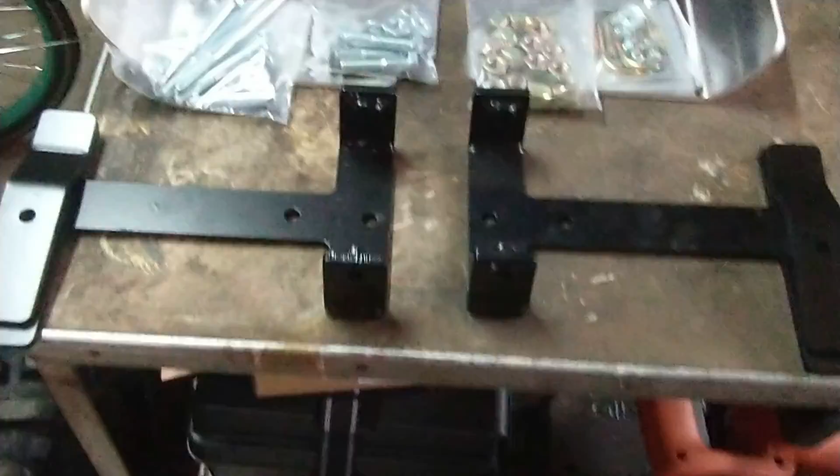Okay, let's see here. Left front tire. Right front tire—you can tell by the direction of the arrow.

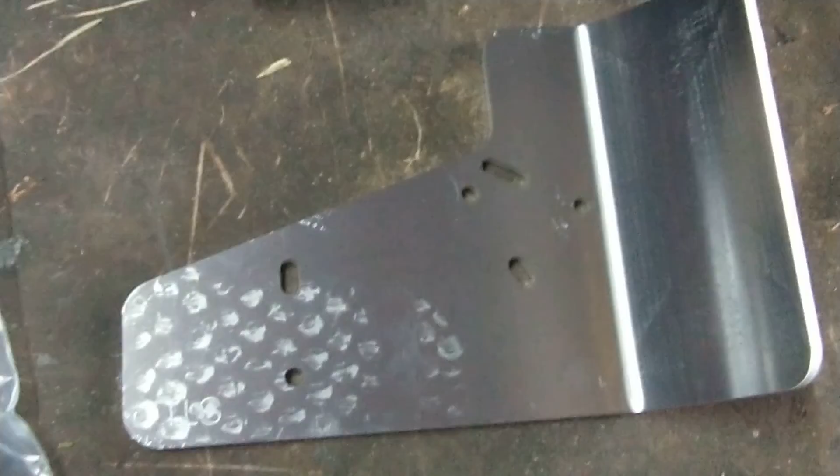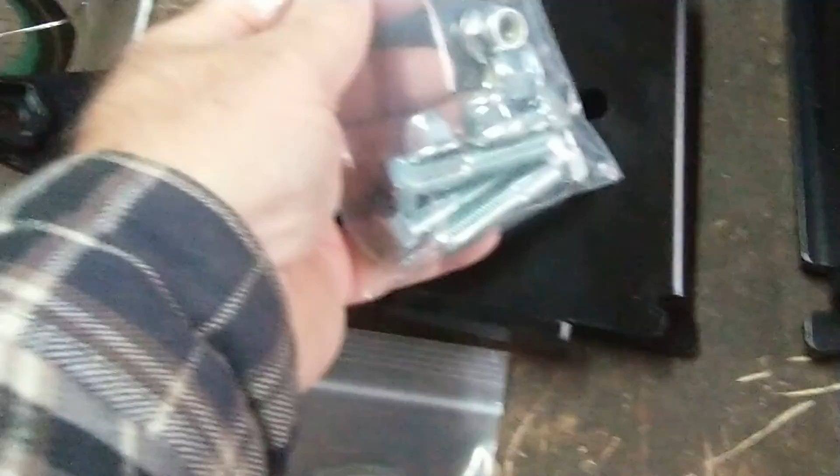Footrest protectors, not sure why we need those, and hardware to install the footrest protectors. Looks like replacement lug nuts. Hardware bag for the front brackets, and hardware bag for the rear—so left rear and right rear. And these screws are long enough to go from there to here.

Alright. Hopefully they sent me everything I need for the project. There you have it. Stay tuned, let's get started.

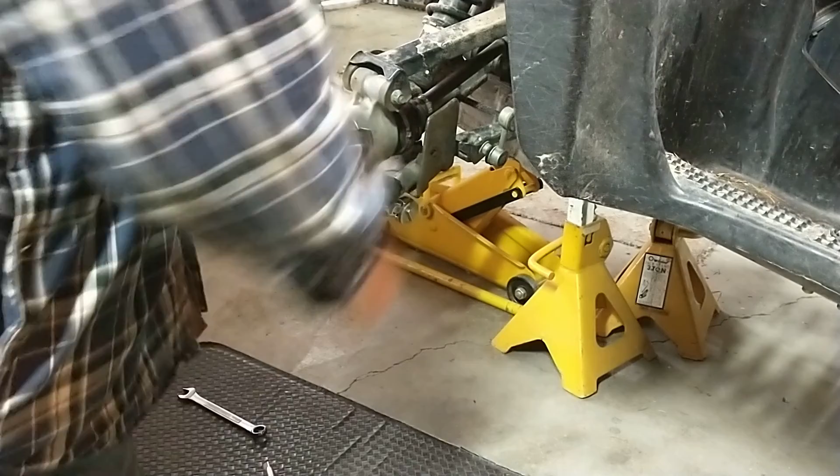Yep, 14mm on this side and 12 on that. You know, sometimes the Japanese have some really weird thought processes about engineering. Socket, or one of them.

Well, good thing I read the instructions again, because this bolt has to go through there ahead of time, because it will not fit. So I gotta do the same thing here. That bolt goes through there.

There we go. Looks like it's supposed to use the nuts that have the flange on it.

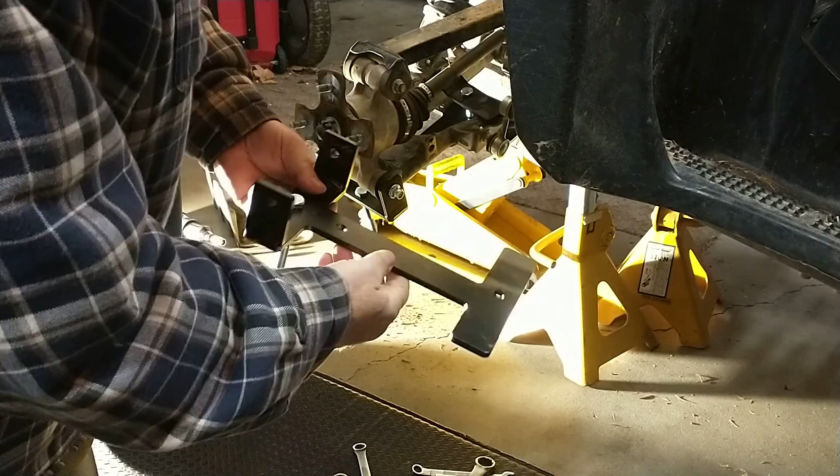Oh, and I went through the manual, and the parts diagram shows different part numbers for left and right. But those part numbers on the manual don't match anything printed on this. And both of these have the exact same part number stamped on them—where'd it go? Right here. I don't know if that's going to show up, but it says S4RR, both of them. But they're not exactly the same—one has it stamped on the front, and one has it stamped on the back. So, there we go.

By the way, this is the right rear axle that we're working on.

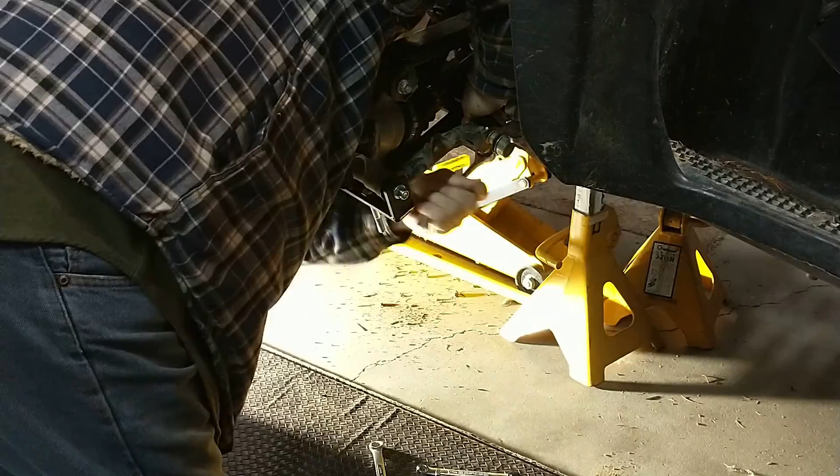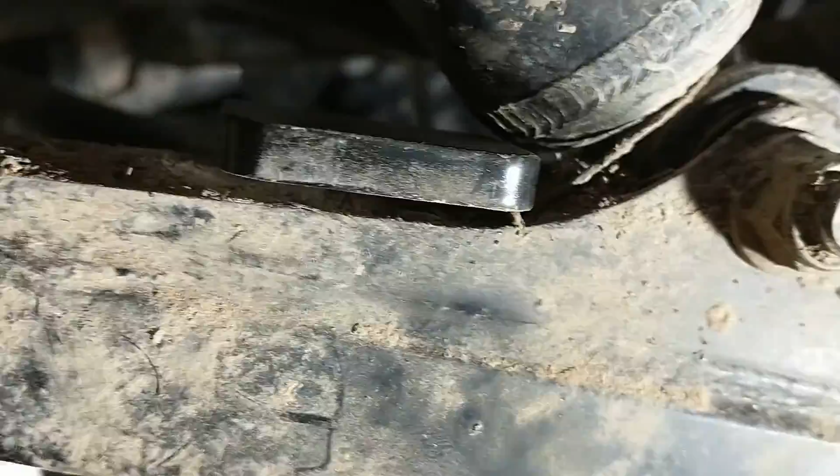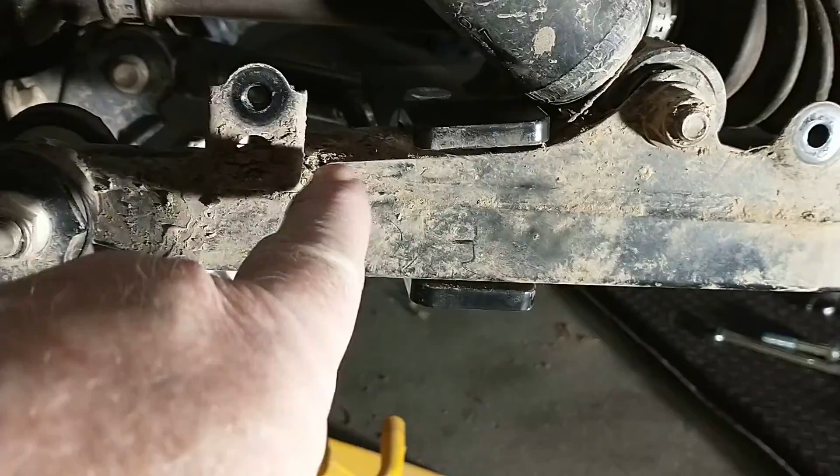It's going to show. So the bottom is fairly flush, but there's a gap in there. It's like these things need to be an inch longer—they need to stick out to here. Maybe, I don't know. This is not square tubing, so I'll have to keep an eye on that. I don't like the idea of that digging into my A-arm, where I wind up having to replace it every year.

Okay, and for the big reveal on why we're doing this, here we go. That's some heavy son of a bitch.

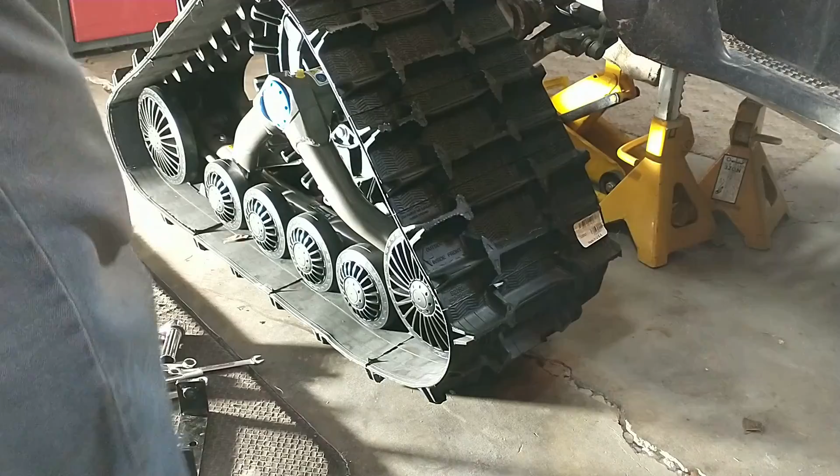Alright, so these puppies are really expensive, almost as much as what my quad is worth. But it hopefully gets me through part of December and into May, where I can't get up in the mountains because there's too much snow. So I turned my ATV into a quasi-snowmobile.

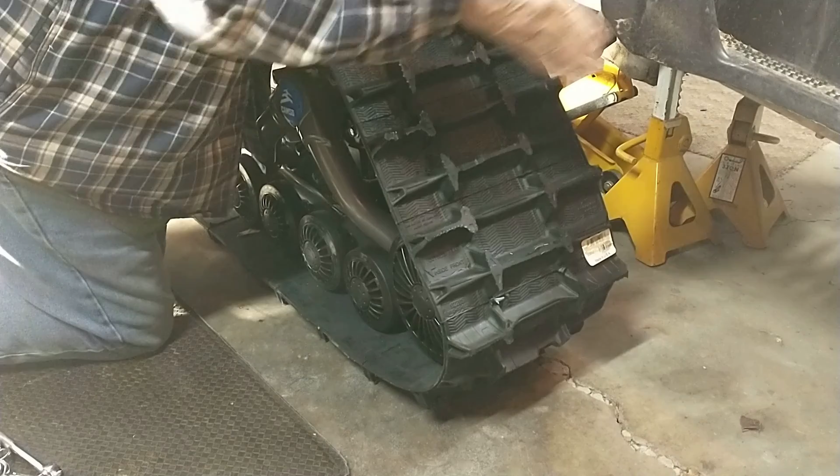I've talked to some people that own snowmobiles and own quads with tracks, and they say the tracks are the way to go. So we're going to give it a shot and see if I can get up to my favorite spots this year, if I can get this thing installed correctly. Because once I get them all installed, then you have to align them so they're all four in alignment, and I haven't looked at the instructions on how to do that yet. So we shall see.

Oh wow, multi-wheel bolt pattern. Lovely, so it's whack-a-mole time, or fit the square peg into the round hole—guess which one is which? There's nothing I see in the manual that says which set of these 12, 13 holes to use for a Suzuki KingQuad. Okay, I'm going to get a real tape measure.

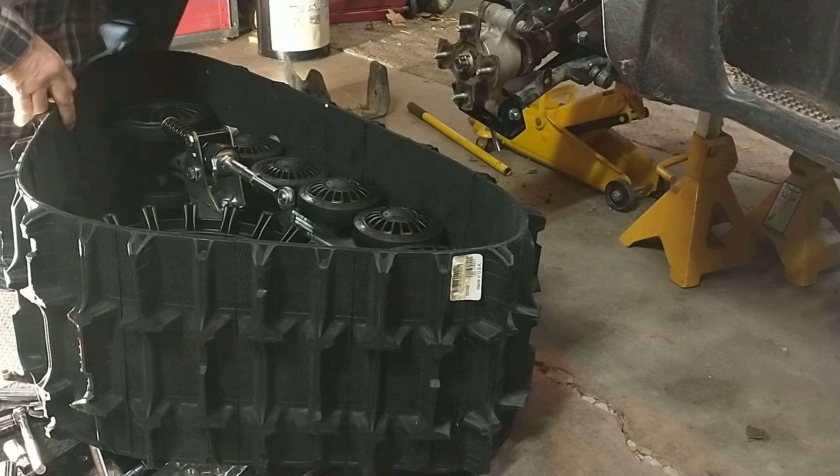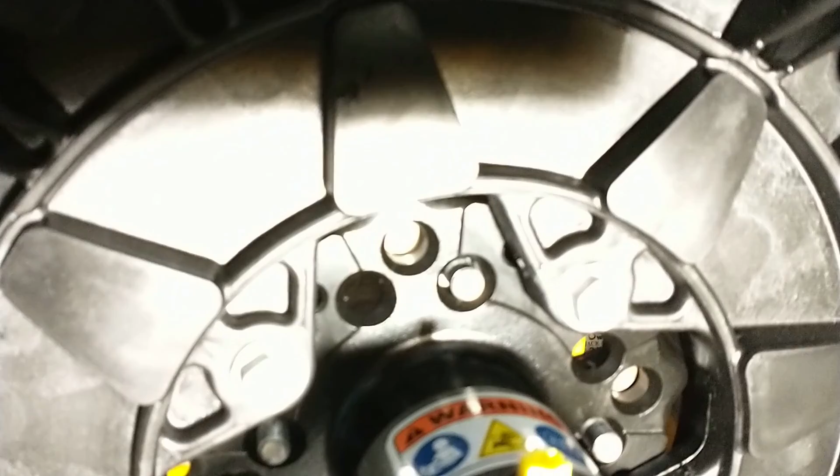Throwing about 7/16, by about 4 3/4. Okay, I don't know if you can see this or not, but the stud is right there in that hole. So the lower left, upper in the middle, and lower on the right, on the top lug nut, and the rest of them fit in there.

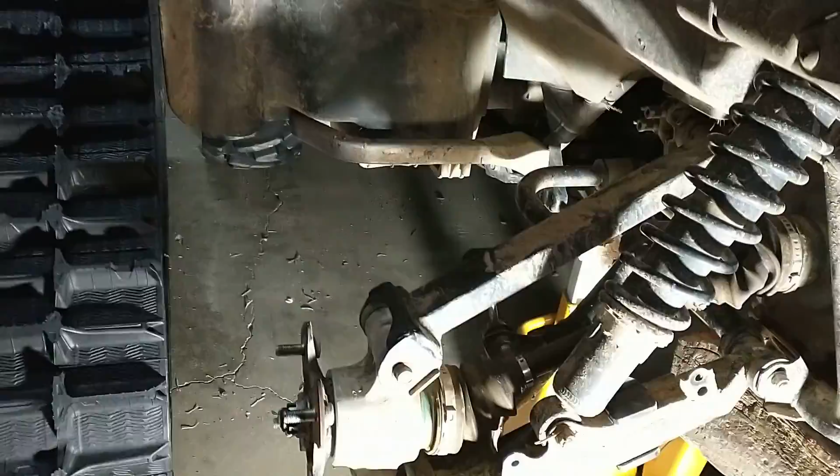That one, that one, that one, and that one. Okay, we're on the left rear side, and this side actually went on fairly much without an issue, maybe because I knew how it's supposed to go on.

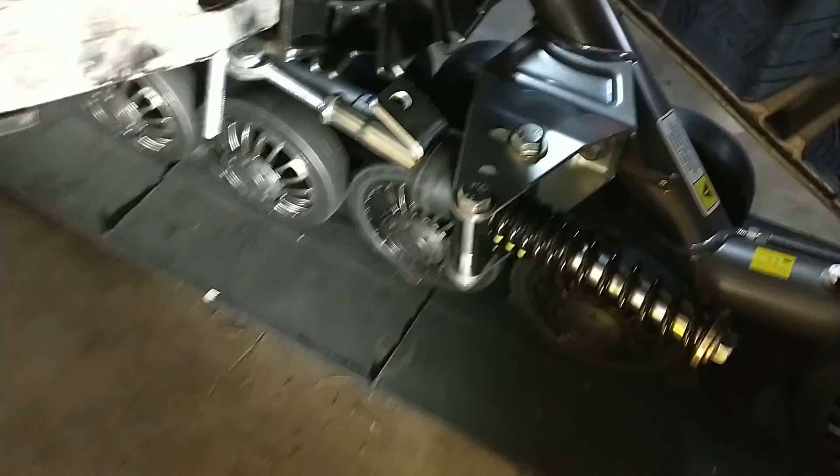So I'm ready to put the undercarriage on, and I'm not going to bore you with lining up those lug bolt holes. But as soon as I get both sides mounted, there's a stabilizer bar that has to be mounted on each side. So I'll come back after I get this jack out of the way and show you that part.

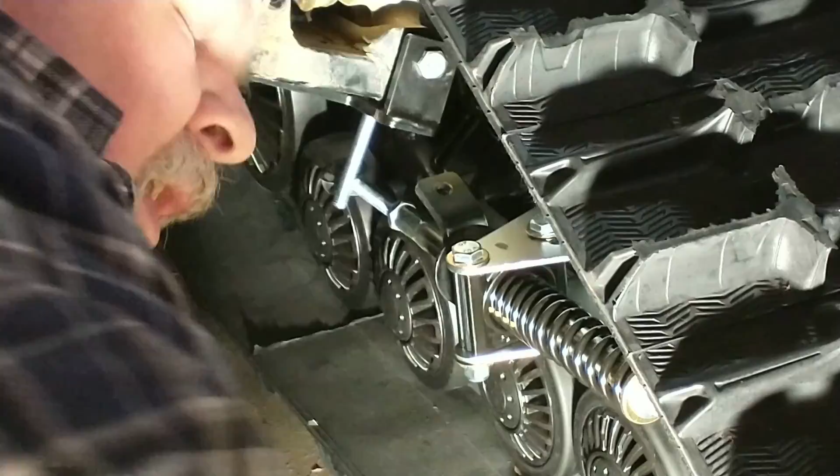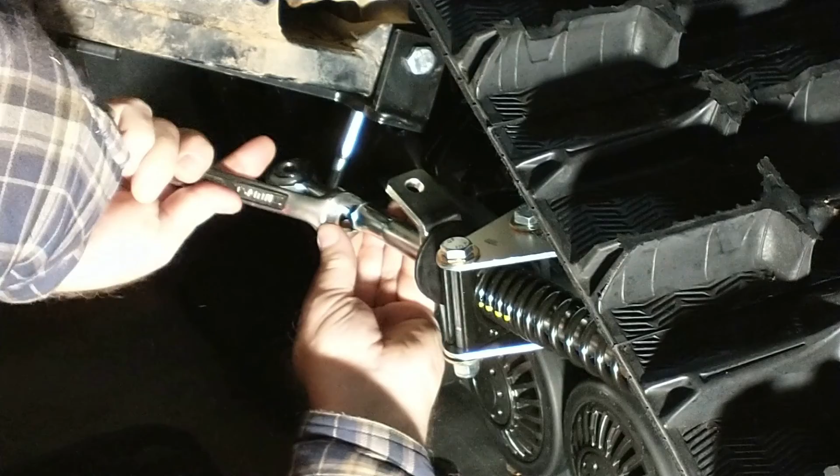I'll try and attach this stabilizer bar to that screw. Whoa. Huh, okay, I'm gonna have to—that's 18 millimeter, maybe a 19. I gotta loosen this nut so I can spin this in, otherwise I am never gonna get that attached.

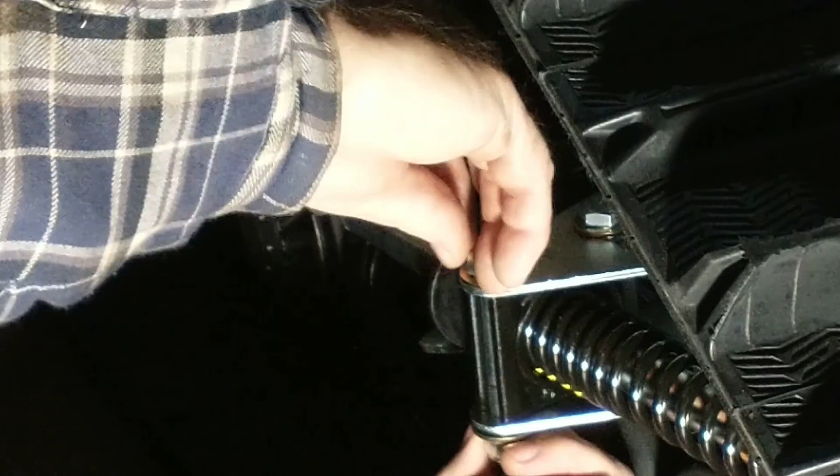Here. Anyway, there's nothing in the instruction manual about having to loosen this up and adjust it. Wow. Let's see if we can do that. Okay, that loosened it. And there's nothing in the instruction manual that says to tighten these down, but they're barely on there, so I'm going to tighten them before we're done, and hopefully that doesn't screw anything up. Because that nylon lock nut has barely got any bite on here at all. Boy, you got to really thread this down some.

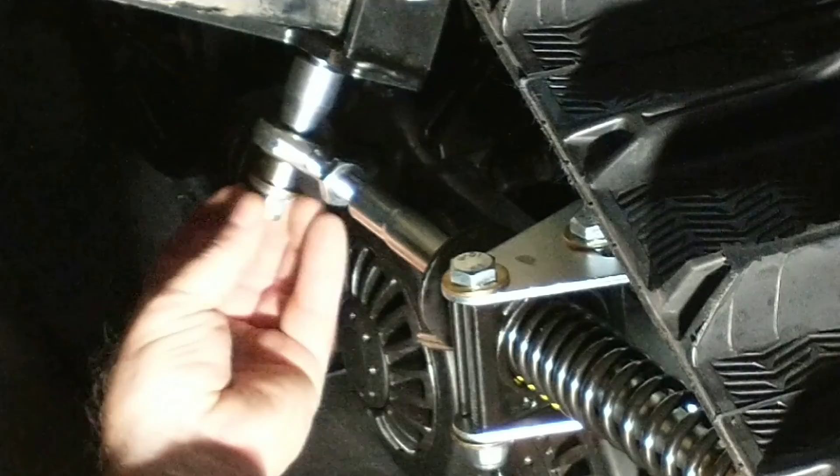Okay, so if we get too carried away, this part has to go on here, slides up into there. Spacer, and a flat washer. And this is a nylon lock nut—it's also got a flange washer built into it. It's 17.

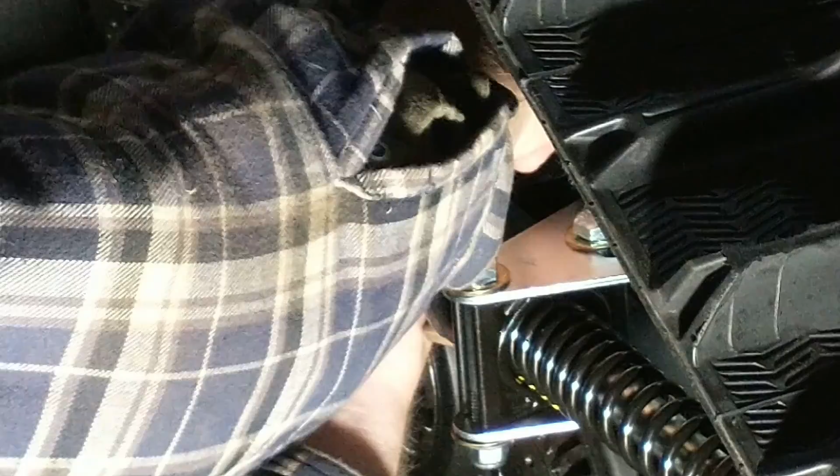I don't know if it's going to show on the camera, but this spacer up on top has about a quarter inch of play. So I'm going to try and get that tightened up.

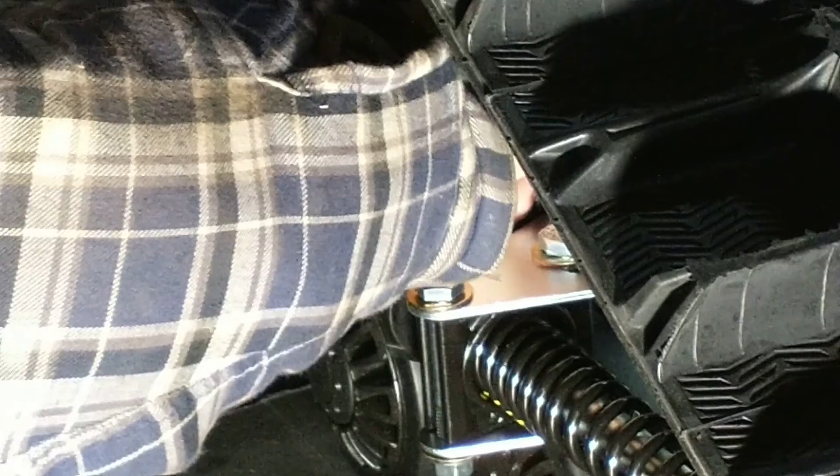Son of a bitch. Ha! I don't think that's coming off of there.

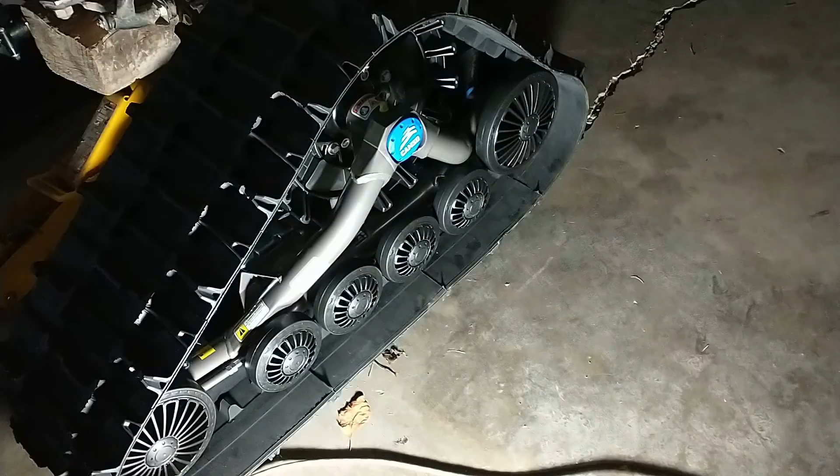I'm going to go ahead and tighten this for now. There's a lug nut. I had to roll this thing forward so I can get wrenches on them, but I need to jack it back up again so I can make sure these undercarriages, as the manufacturer calls them, the track hubs, are able to get flush all the way up against the wheel hubs that are part of the ATV. So I'm going to jack it back up again.

Now I don't know if you can see that track is moving quite a bit there. Alright, I should be able to get these lug nuts tightened up now.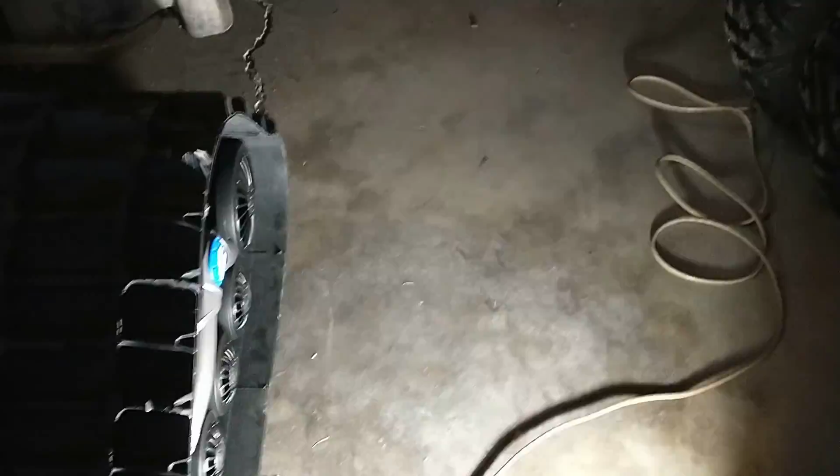I got the stabilizer bar connected on the other side, and I tightened those two bolts too while I was under there. Wonderful instructions they have on the manual here, because they don't address that at all - spinning that eye bolt in and out. Maybe it'll be addressed when I get to the alignment portion. I don't know, we'll see.

So I had to pull this forward a few inches to get those lug nuts to rotate where I could get a wrench on them. So I'm going to get that done, check things out, and then we'll get started on the front. Oh, by the way, this is the left front.

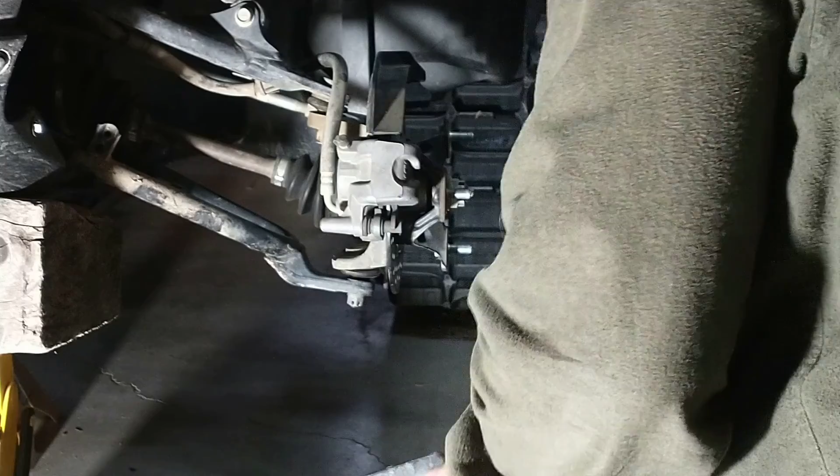Okay, this guard, both sides, has to come off - guard, skid plate, whatever you want to call it. The good news is, unlike the rears, I don't have to disassemble the A-arm to get this to work, I think, according to the instruction sheet.

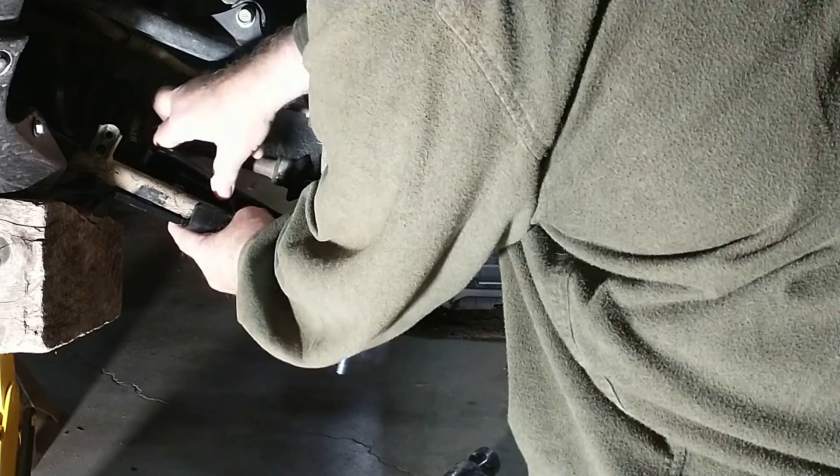That is got an insert there, so I line the bolt up, and that way we'll be able to tighten it. Will it hold? We'll see. Get that out of the way.

Instructions show the bolts coming up through the bottom. Seems kind of weird to me.

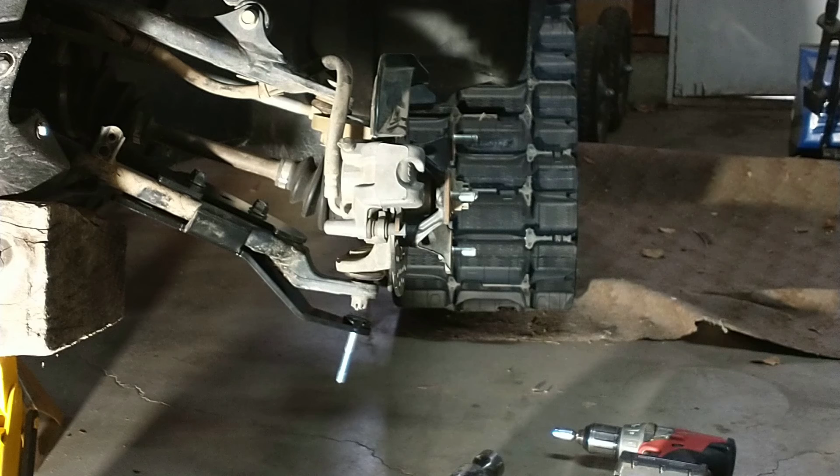Instructions say, position the bottom part of the anchor bracket, 2-3, underneath the lower suspension arm. Position the top part, 4-5, over the suspension arm so that the tenon slips into the mortise cut in the bottom part. Insert the M10 by 50 millimeter bolts through the bottom and secure the two parts together with the nuts provided. Tighten assembly to 37 foot-pounds of torque. Refer to figure 13. See?

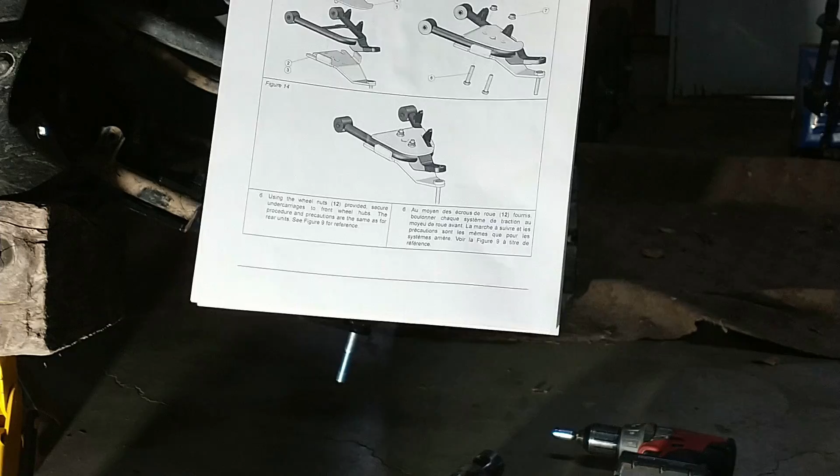Nothing about adjusting this back and forth. Using the wheel nuts provided, secure undercarriages to front wheel hubs. The procedures and precautions are the same for the rear. See figure 9. Figure 9 was the figure for the rear hubs.

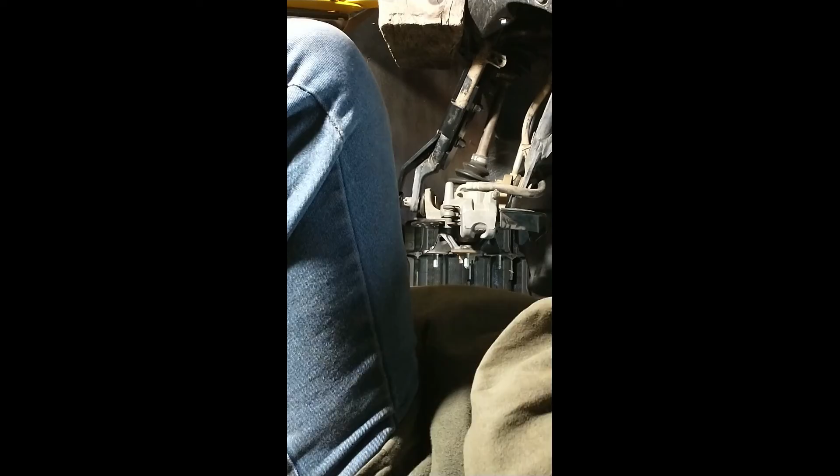I want to show you something. These are also labeled inside. So on the left you can see the wheels turn - that's front steering wheel, front steering axle. So this is saying this is the left front.

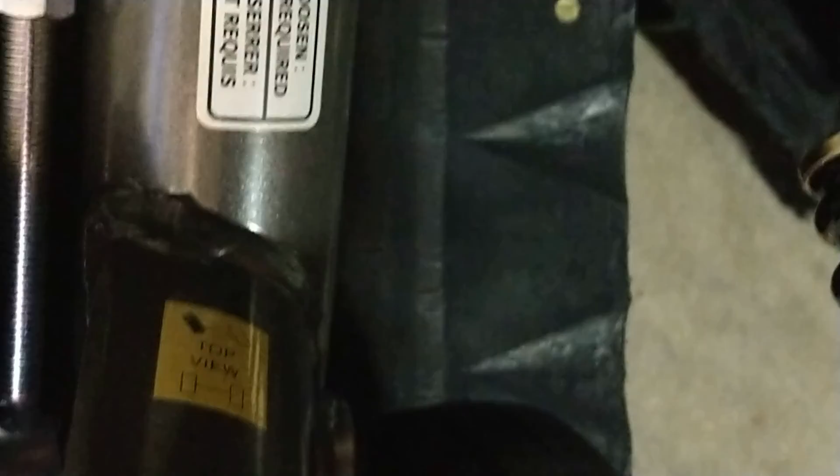I don't know if the camera will fit in here. Left front to this. Well, these front tracks are definitely lighter than the rear ones, but I don't know if that's really saying much. Phone ran out of storage when I was doing the other side, but this side here, two clamshell pieces went on just like the other side did.

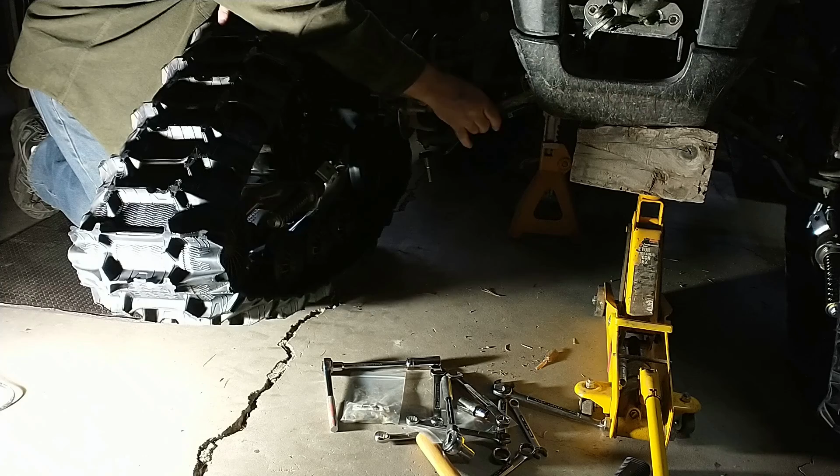Oh, there we go. Alright, down we go.

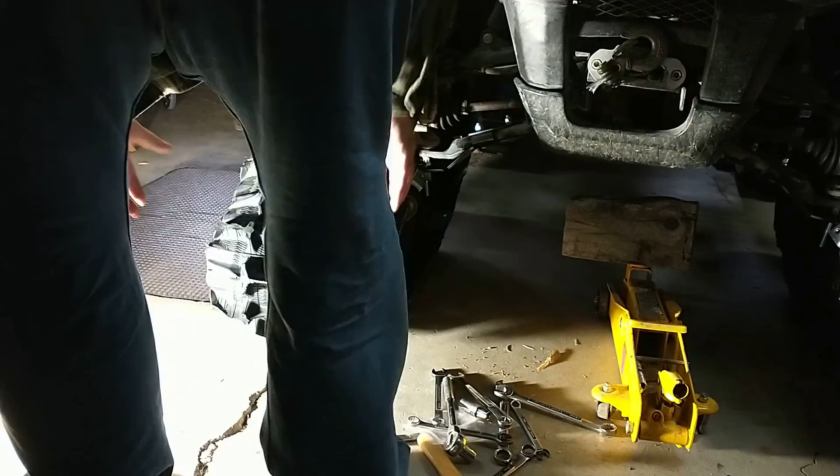Alright, stabilizer bars are attached. They're not tightened down yet.

Still have to install one lug nut on each side and then tighten all four of them down. So I'm going to have to move this to rotate those track hubs so I can get a wrench on the lug bolt. So I'll get that done and then I'll come back and we'll look at the footrest guards.

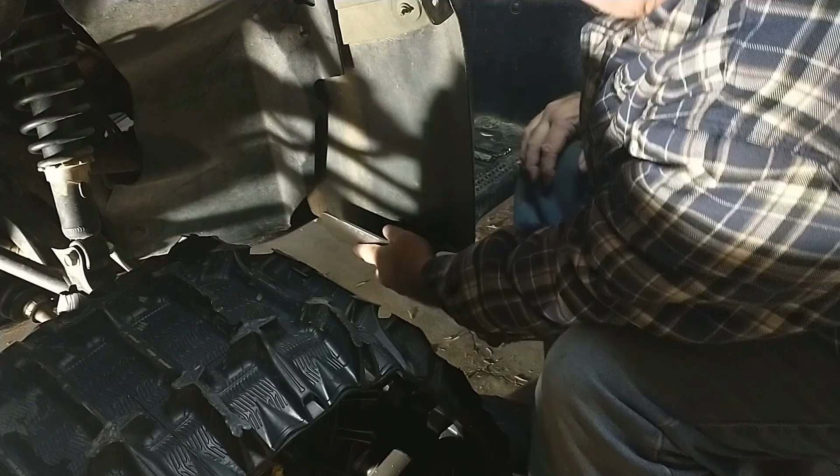So these are the footrest protectors. And there's no real rhyme or reason how these are supposed to go.

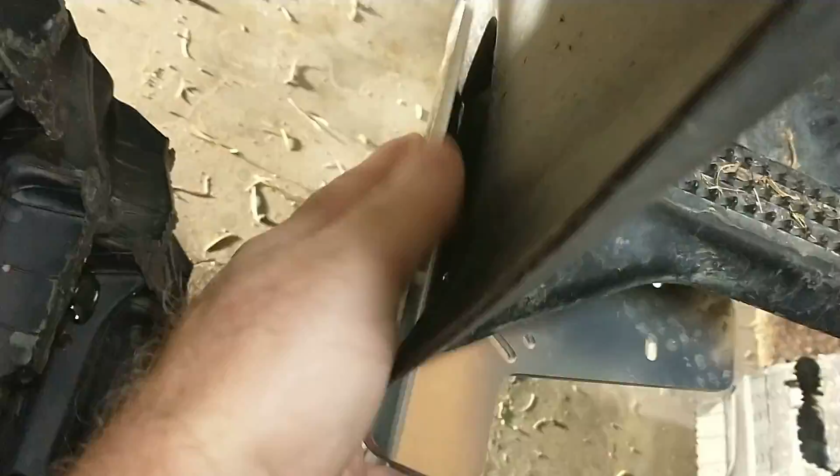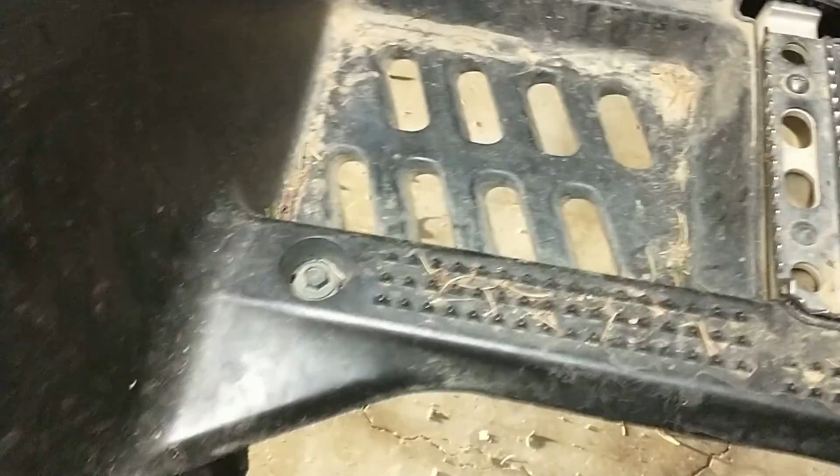To get a better understanding what I'm talking about, they've got these holes in here which the U-bolts are supposed to go through, and none of them line up. You're supposed to put a U-bolt through this plastic and that's gonna hold. Yeah, I don't think so. So their instructions in the manual aren't worth a crap. I'm gonna have to take this by the dealer and say, I'm from Missouri, so show me. Just kidding about the Missouri part, but yeah.

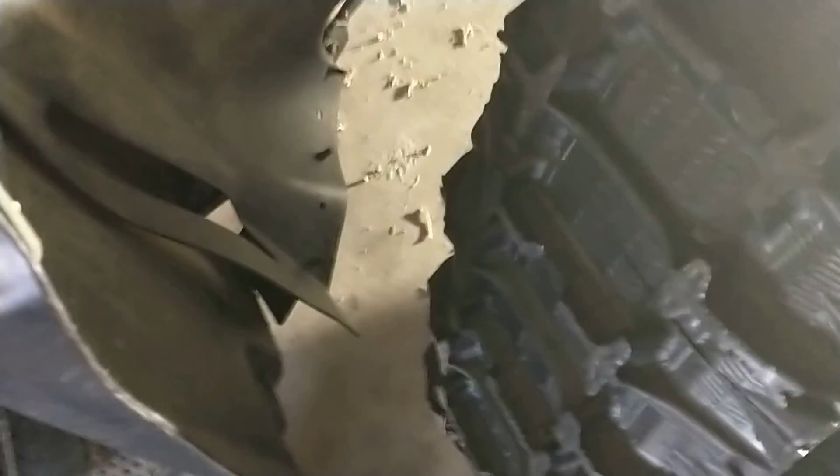I noticed I was getting contact. I took this out for a test. When I turn the handlebars and hit the bumps, those tracks start contacting the inside of that fender wall. So I'm going to have to trim all this out.

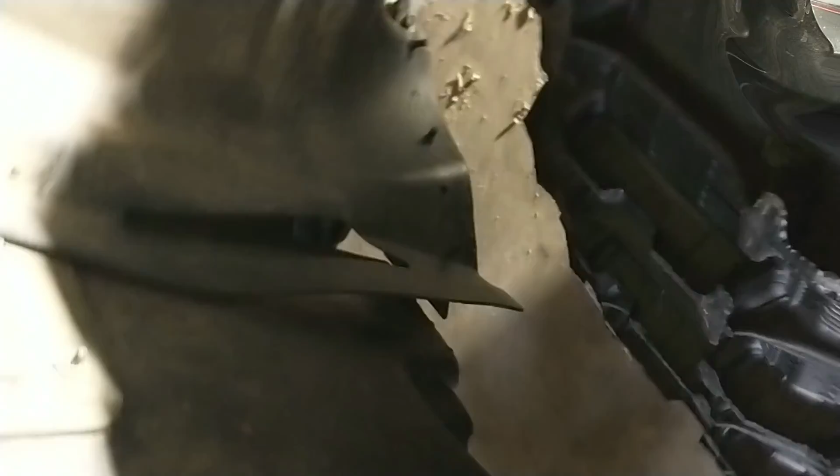That's how much I cut off, about like that. Okay, that's how much I took out on this side, that's how it looks there. And that's how it looks on that side.

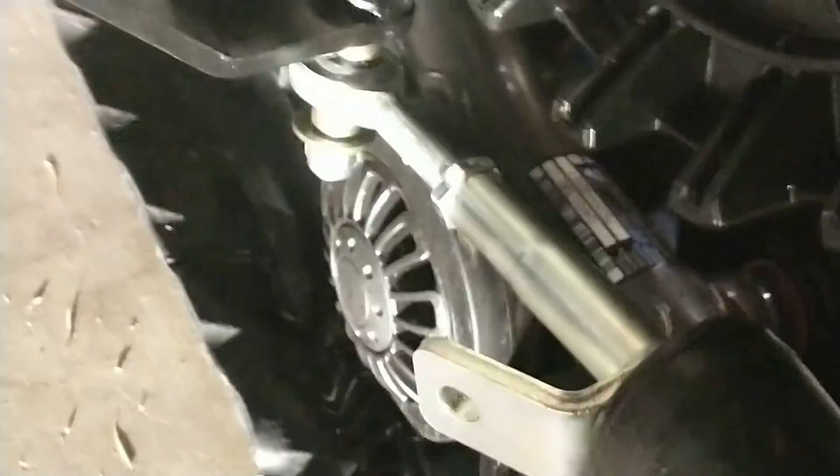Alright, so it's too hard to film this down underneath here while I'm adjusting, but adjusting the angle of attack, you have to loosen this nut here, that one there, and then you have to spin this, and that moves the eye bolt in and out.

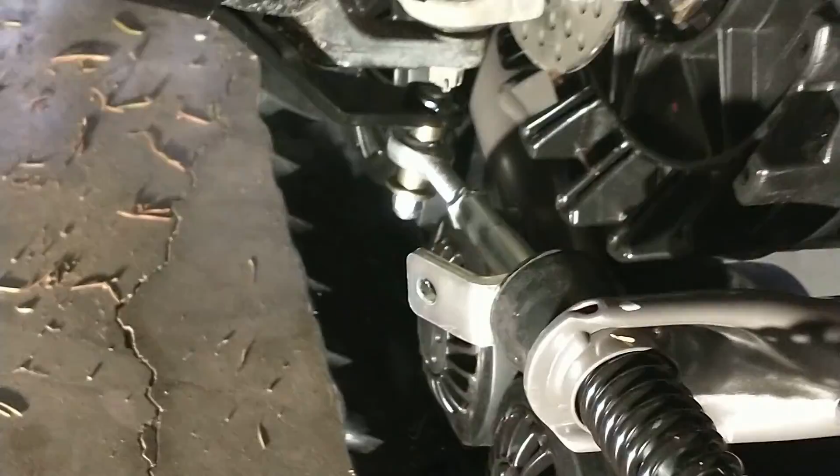And according to the manual, you're supposed to leave that end - I forgot what they call that - pointing in towards the middle of the quad. And there's no real explanation of why. So there you have it.

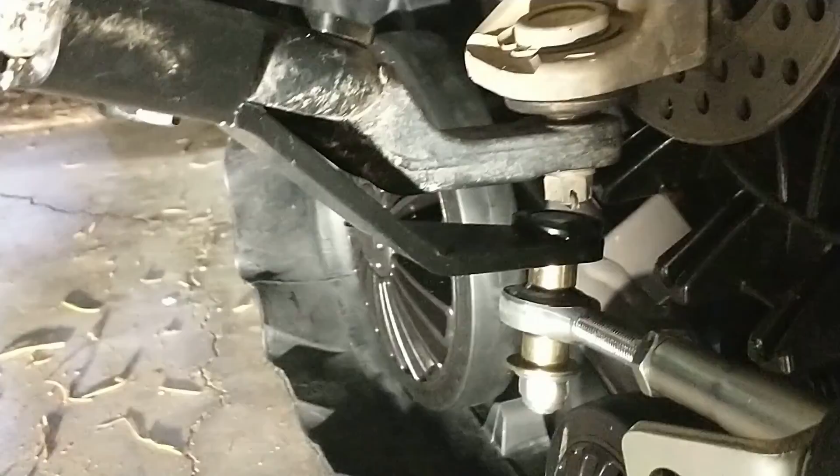So these angle A-arm brackets, they reduce that ground clearance 2 inches underneath that nut with the cotter pin through it, and that bolt sticking down another 2.5 inches. That's all going to have to come out, unless I find a way to put a nut in there and reverse that bolt assembly. But at this point, maybe for next year I'll figure something out, but it is what it is. Same thing over there.

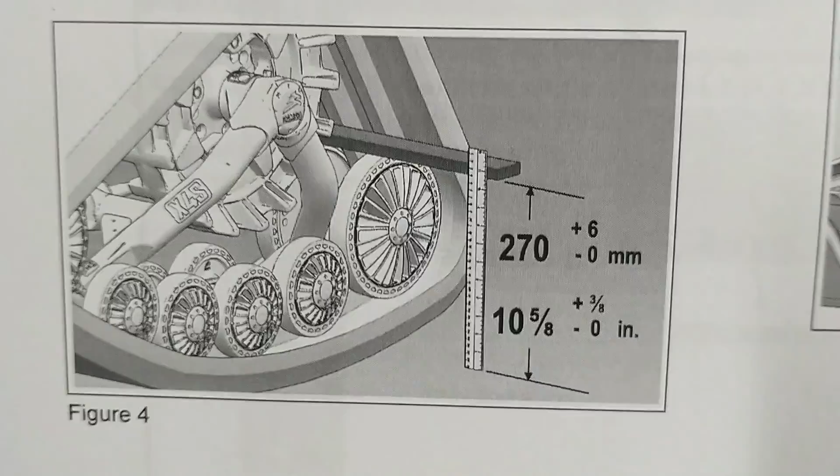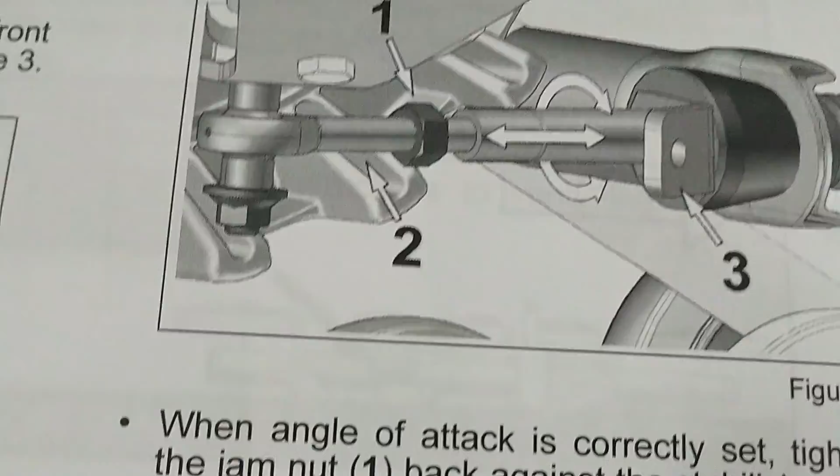So not quite through with the alignment. I've got to do the toe in, toe out. Just quickly with the instruction manual, here's the directions for doing an angle of attack: 10 5/8 inches off that stick laying on top of the wheels. And that nut, which I showed you earlier, part 1, and what do they call that... part number 3 is the what?

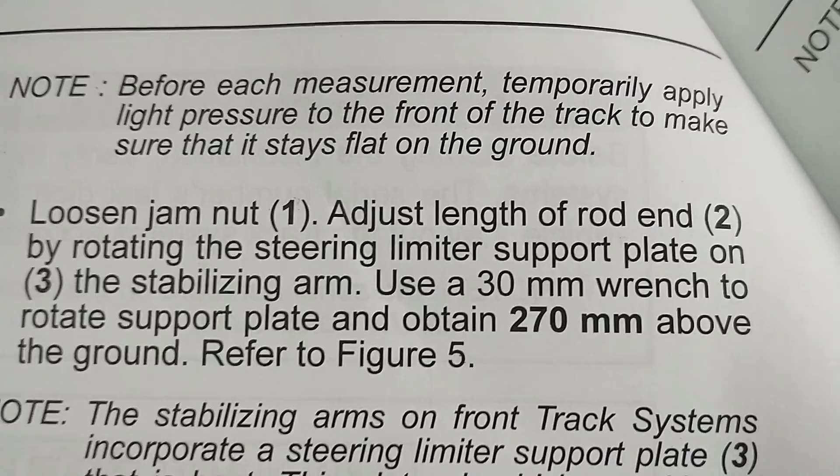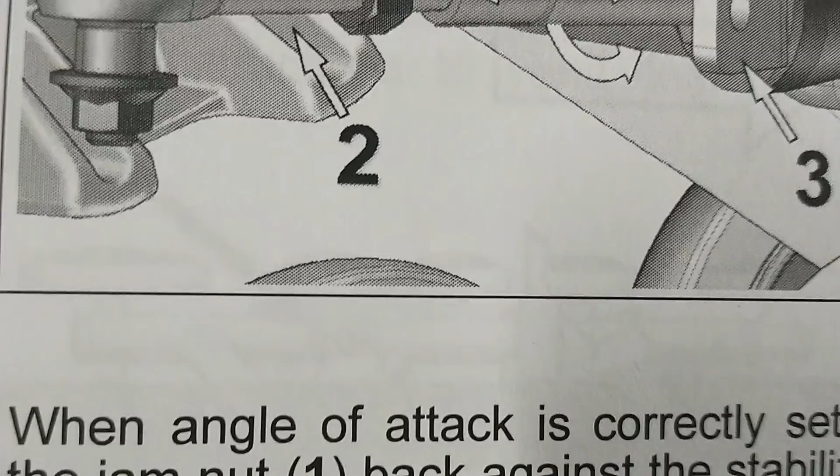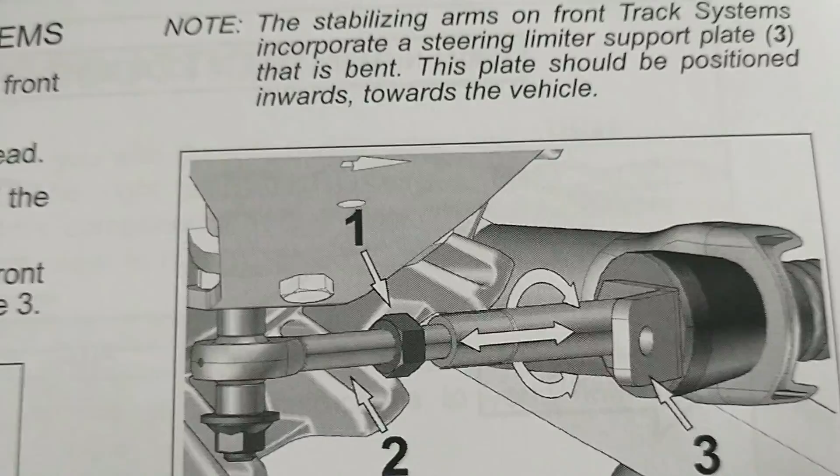It says by rotating the steering limiter support plate on the stabilizer arm, item number 3. Stabilizer arms of front track should have the steering limiter support plate bent. The plate should be positioned towards inwards towards the vehicle. Blah blah blah. And angle of attack on the trailing arms is different - oh sorry, that's rigid axle. Angle of attack on independent suspension, make some adjustments, blah blah blah.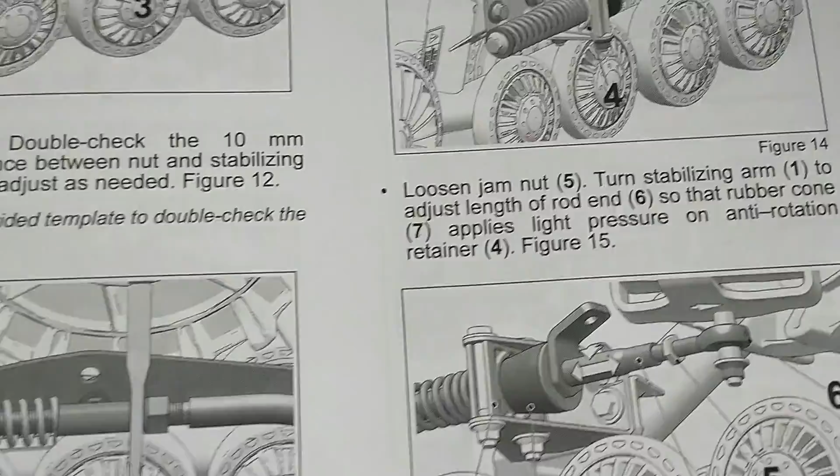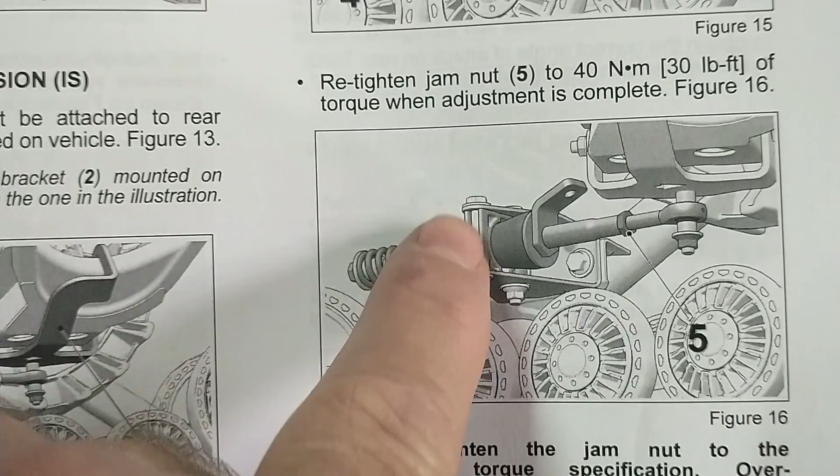Basically, there's a rubber cone right here. It wants to make sure that it's snug against this bracket here, between there and there, without any slop or play.

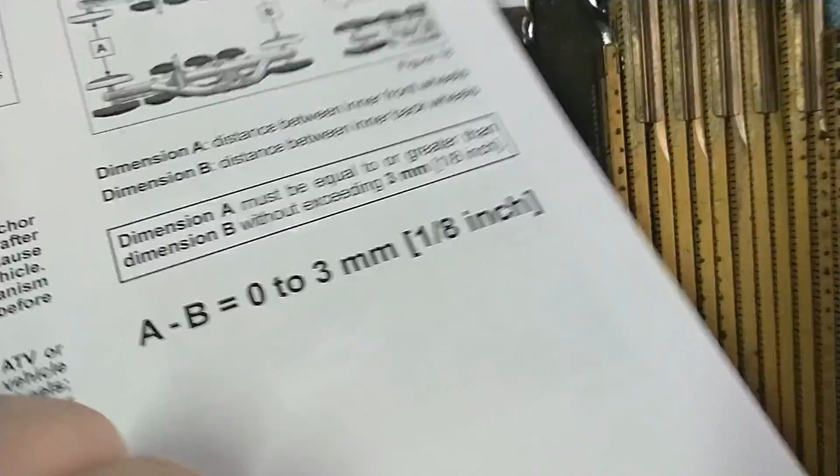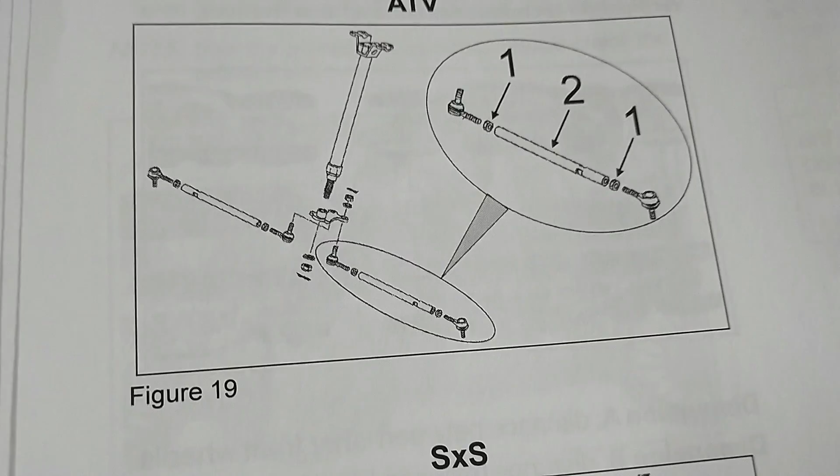Okay, now to adjust the front steering, they want me to go in there and start cranking on my tie rods by loosening the collar, blah blah blah. So it has to be within... what is our spec called for here? 1/8 of an inch from the front to the back, or it could cause damage to the tracks.

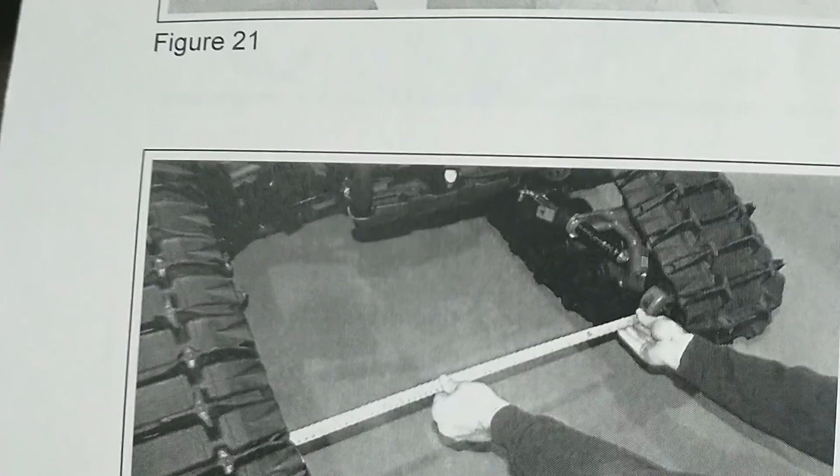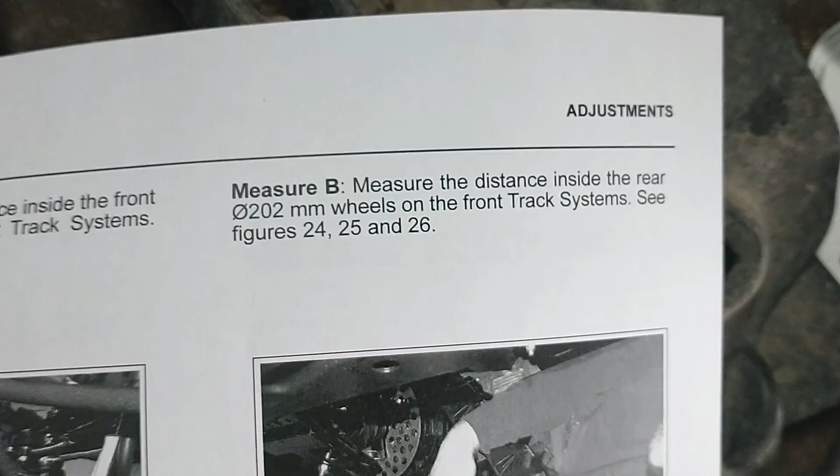Alright, so I'm going to get under there and try and simulate taking that measurement - measure the distance inside the front wheels on the front track system, see figures, blah blah blah. So I'm going to get my tape measure, and then I'm going to measure the distance inside the rear wheels on the front track system, and do the same thing. It has to be within 1/8 of an inch, or I have to go and start cranking on these rods. Wonderful. Here we go.

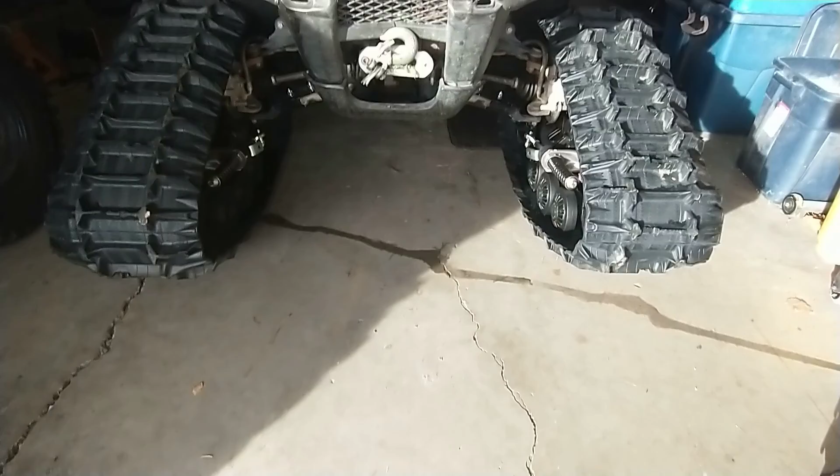No, that's about 1/4 inch off. So do we want to take it up all on one side, or split the difference in half and half? Well, looking at this, it looks like the front of this track is pointed outwards, versus this one seems to be kind of aligned. Apparently I left the record on pause, so didn't get to record that, but my recommendation is, that was a real pain. Don't go one turn at first, go a 1/4 turn. I had to go back and forth a few times, and just eyeballing this, I'm not sure it lines up right, front to back.

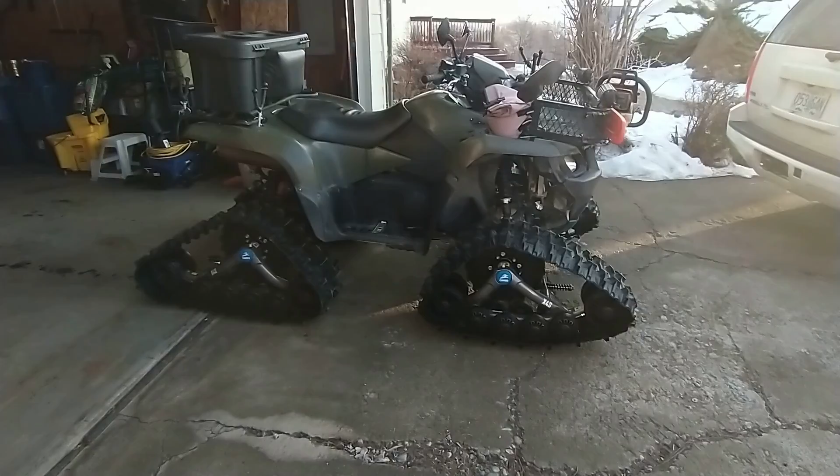But alright, there's a better shot of everything set up. I've already taken it up to the mountains and had a test run. So you'll have to look at test run part 1 on the next video coming up as soon as I get it edited. But yeah, worked out well. Happy with it so far. You'll have to stay tuned for more videos through the winter, hopefully.

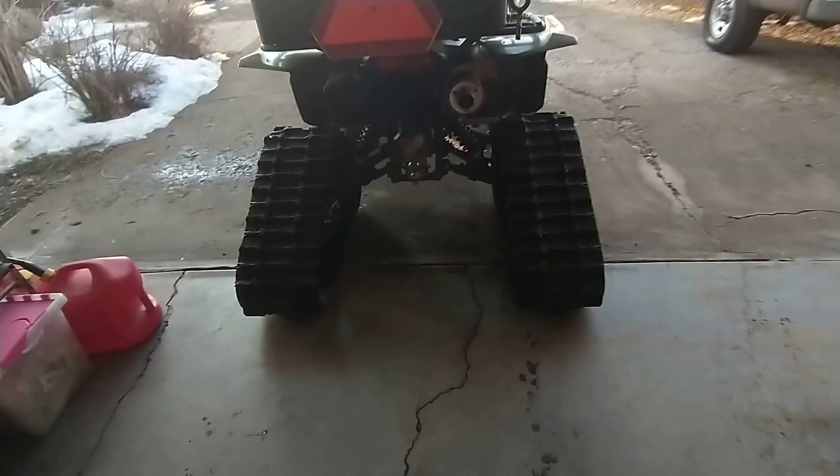Oh, and so there you go - ATV track installation on a 2008 Suzuki 750 KingQuad with Armstrong steering, as in, I better make sure I use my Wheaties or eat my Wheaties, because I ain't got no power steering.